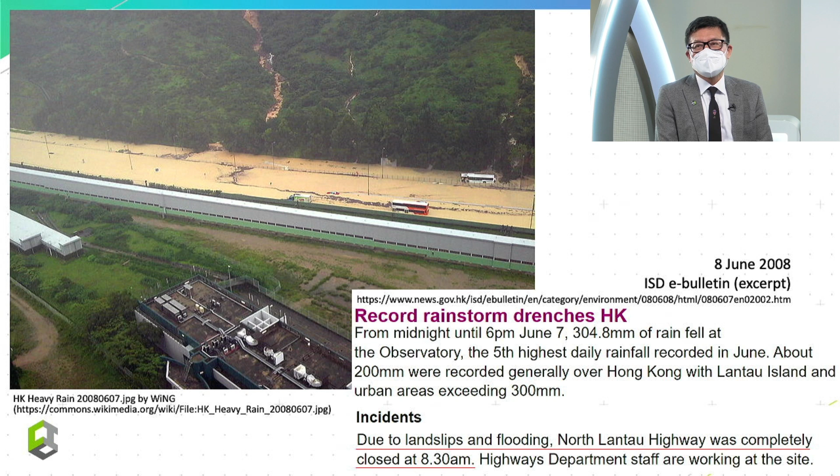Let me tell you something about the background of this project. In June 2008, there was heavy rainfall in Hong Kong. On that day, the whole North Lantau Highway was flooded by rainwater and landslide, so the road access to the airport was totally cut off.

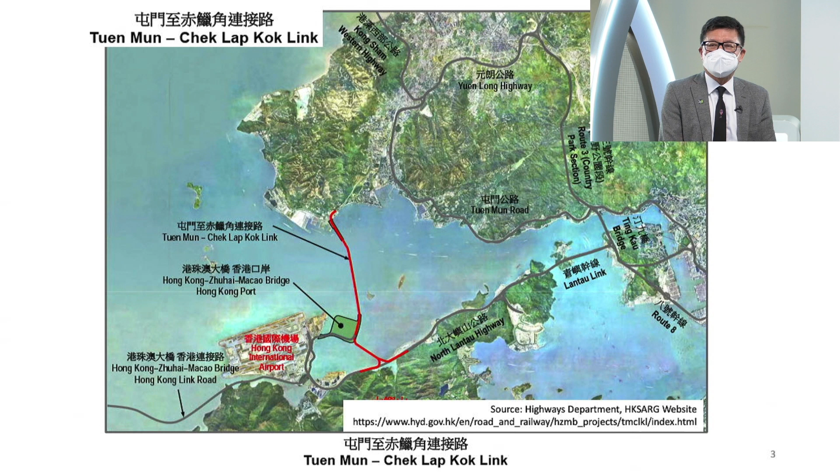This triggered the Highways Department at that time to push hard for an alternative route to the new airport. This slide shows the routing of the Tuen Mun to Chek Lap Kok Link, making use of the man-made island of the Hong Kong-Macau Bridge near the airport to provide a landing point for the tunnel.

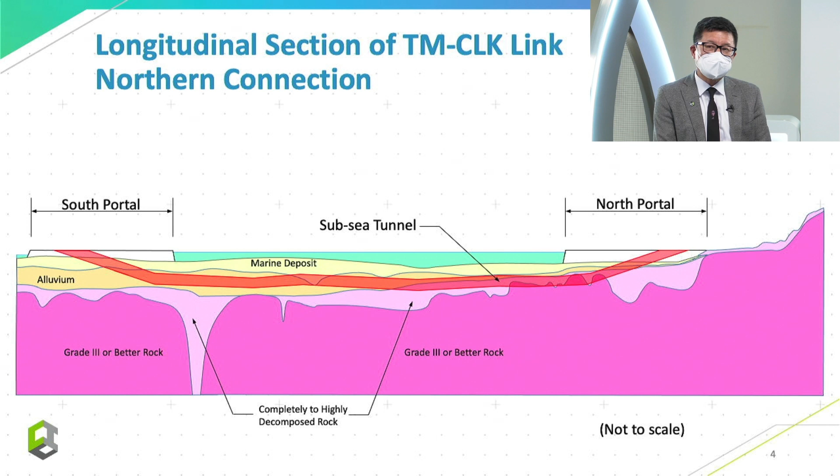After exploring different options for the route, the Highways Department decided to use a very deep subsea tunnel, going through difficult geological seabed conditions as shown in this slide. So you can appreciate how difficult this project is. Without further ado, let me start with the first question to Chris.

The Tuen Mun to Chek Lap Kok Link interconnects with the Hong Kong-Macau Bridge and the existing road network in Hong Kong, and further north to the road network in the Greater Bay Area. So Chris, can you tell us the strategic value of this project?

Okay, thank you Albert. The Tuen Mun to Chek Lap Kok Link is divided into the southern connection and northern connection. The southern connection, mostly on viaduct, was opened to traffic in 2018. The northern connection, mainly comprising a subsea tunnel, was commissioned on December 27 last year.

The strategic value of the Tuen Mun to Chek Lap Kok Link is multifold. First, the 9-kilometer link provides a strategic connection linking Northwest New Territories to North Lantau, Hong Kong International Airport, the Hong Kong-Zhuhai-Macau Bridge, and Hong Kong Port. It shortens the traveling distance between Tuen Mun South and the airport by about 22 kilometers, with journey time reduced by about 20 minutes.

At the same time, it helps divert traffic to and from Lantau, reducing the traffic load on the North Lantau Highway, Lantau Link, and Tuen Mun Road. More importantly, the new link provides an alternative road access between the airport and the urban area in addition to the Lantau Link, providing a better and more reliable transport structure to Lantau, which is the aviation and land transport double gateway connecting Hong Kong to other parts of the world and mainland cities of the Greater Bay Area. This reinforces Hong Kong as an international and regional hub.

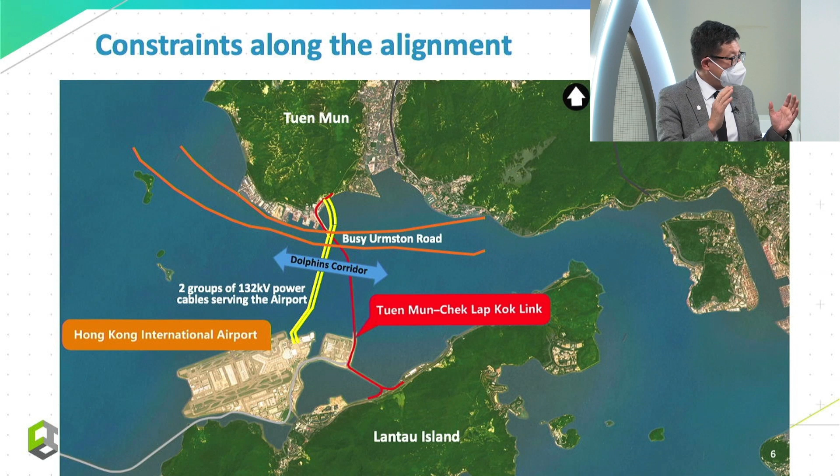Okay Chris, I understand that the Tuen Mun to Chek Lap Kok Link is the first subsea deep tunnel constructed by TBM, so there must be a lot of challenges during construction. Can you tell us some of them?

Yes, it's a very challenging project. The section of the northern connection linking Tuen Mun and the Hong Kong-Zhuhai-Macau Bridge, Hong Kong Port, lies across Urmston Road, which is one of the busiest navigation channels in Hong Kong. The alignment of this section is within an environmentally sensitive area.

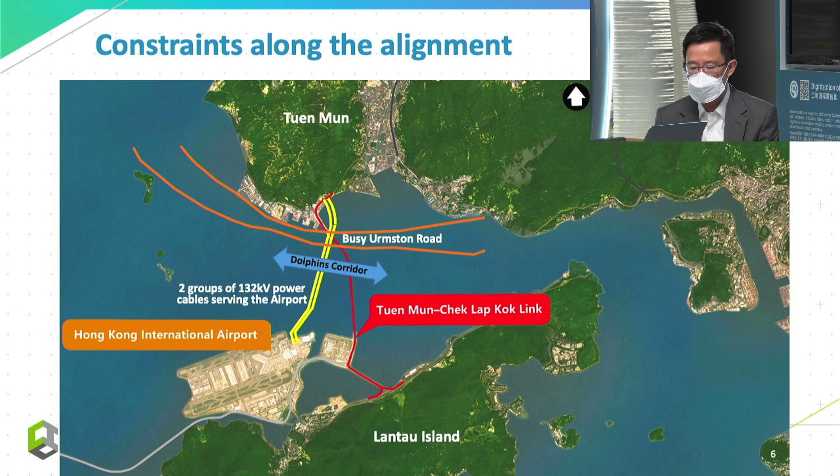There are also two submarine power cables serving the airport. To minimize the impact on Urmston Road, the habitat of the Chinese white dolphin, and the nearby marine ecology, and to avoid the need to divert the existing submarine power cable serving the airport and eliminate dredging and disposal of 11 million cubic meters of marine sediment, a TBM scheme was chosen for the Tuen Mun to Chek Lap Kok Link subsea crossing in preference to immersed tunnels.

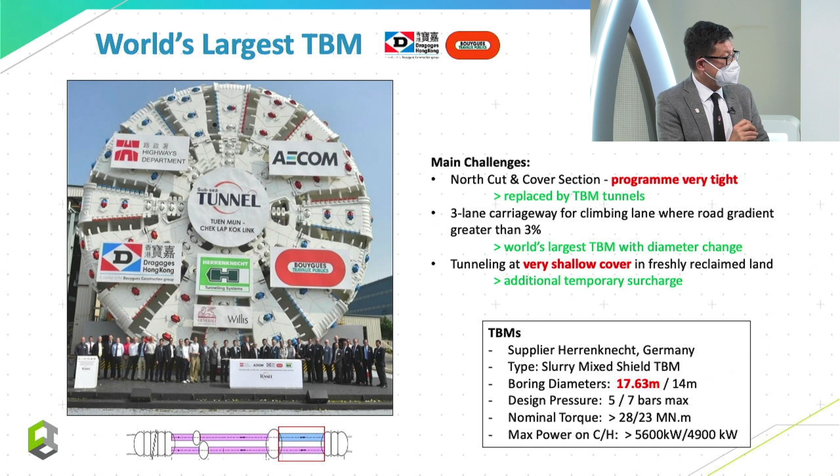I see. Okay, now Wes, Chris just talked about the challenges, so there must be some very interesting solutions to resolve these challenges. As the main contractor, can you tell us something about it?

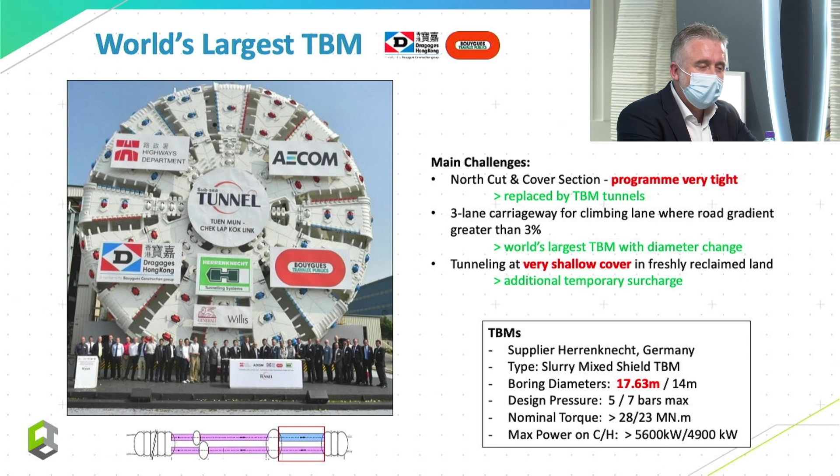Sure. As Chris said, for the challenging geology we used two slurry TBMs for the main drives. However, the original scheme also required construction of traditional cut and cover structures at the north and south approaches in newly formed reclamations. So the additional challenge was the time needed to construct the reclamation first, and then the traditional cut and cover structure, both taking quite some time.

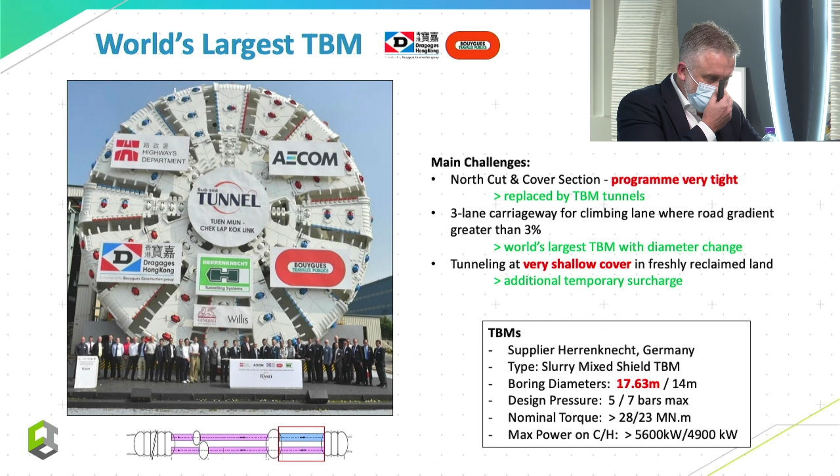So we developed a scheme to replace the cut and cover with extended TBM drives, resulting in a much smaller launching shaft and then extended tunnel section up to the ventilation shaft. This solved some of the problem, but it also created other challenges because the road gradient on the northbound incline was around 3%.

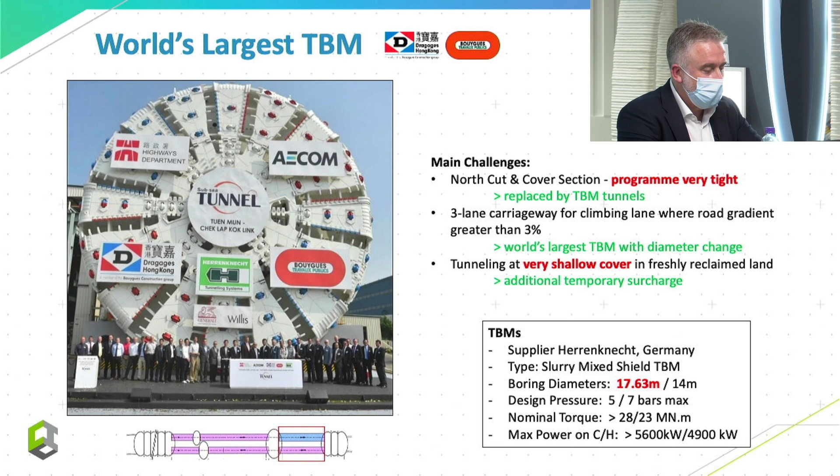Therefore, we needed 3-lane width on the alignment and a very large cross section. So the solution here was to introduce the world's largest TBM.

Whilst this overcame the width challenges, it also created other challenges which needed careful consideration, such as how to construct such a huge machine inside a shaft, and how to accommodate up to a 560-ton capacity crane — some very challenging constructability issues.

So we designed a circular shaped D-wall for the shaft, which is a very stable structure, with strutting needed only at those intersection nodes of the circular elements.

If we play a short video now, you can see in a time-lapse video the assembly of the machine. You can see the pieces of the shield being installed with the main drive. Then we install the face of the machine, the back part of the shield going in, then the segment erector, and then the backup gantries to follow. You can see here lots of working space and a really good working environment for such large equipment.

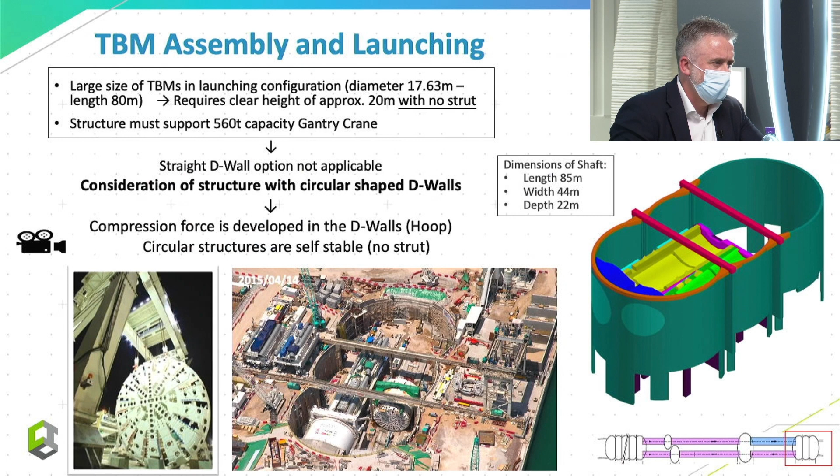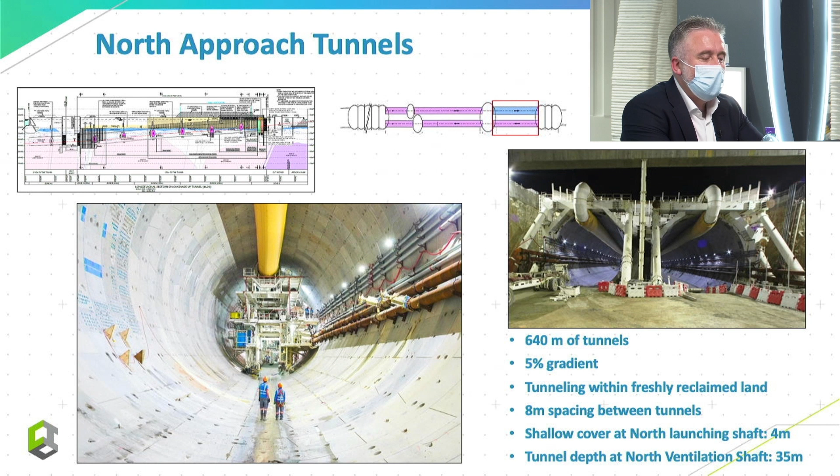Then we launched both machines. Particular care was needed here, especially at the beginning where we had as little as 4 meters of cover, and we end up with 640 meters of twin tunnel, replacing what would have been a very time-consuming cut and cover structure. So we arrived then at the north ventilation buildings.

The next challenge: how do we cross this vent shaft? And at the same time, we have to reduce the size of the large diameter machine, because as we get into the subsea section, we no longer need this large diameter.

So for the first machine, we created a steel bell. You can see to the right of that photo this steel bell structure filled with concrete. This allows the first machine to pass through in a normal tunneling mode. It takes about 1 week, where normally it would probably take more than 2 months.

We don't need the very time-consuming construction of break-in, break-out structures and so on. At the same time, it allows sufficient space to remove the larger diameter shield and replace it with a smaller diameter.

You can see again in the picture on the right, a bit rusty, the larger diameter shield being replaced at the front of that photo with the smaller diameter.

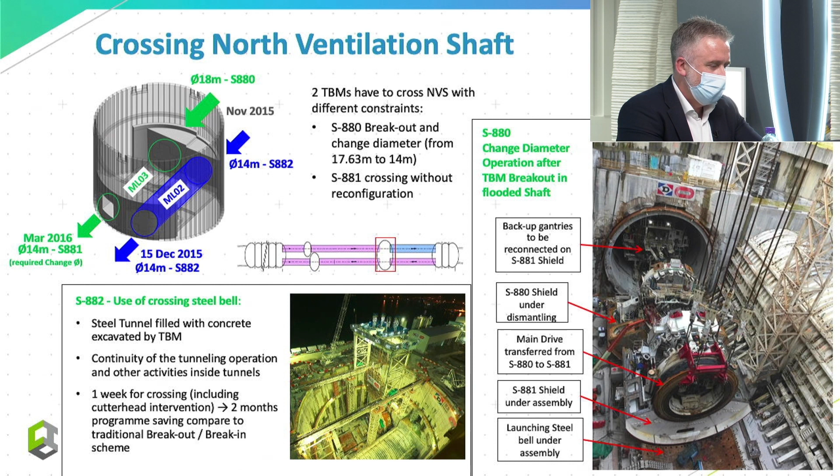Oh, okay, great, Wes.

Understand that, as you said, the size of the TBM cutterhead was the largest in the world at that time. And also because the tunnel needed to go underneath the sea, 50 meters below sea level, it must be very difficult for the workers to go out to do maintenance on the cutterhead. Can you tell us if there's any special method to cater for that kind of situation?

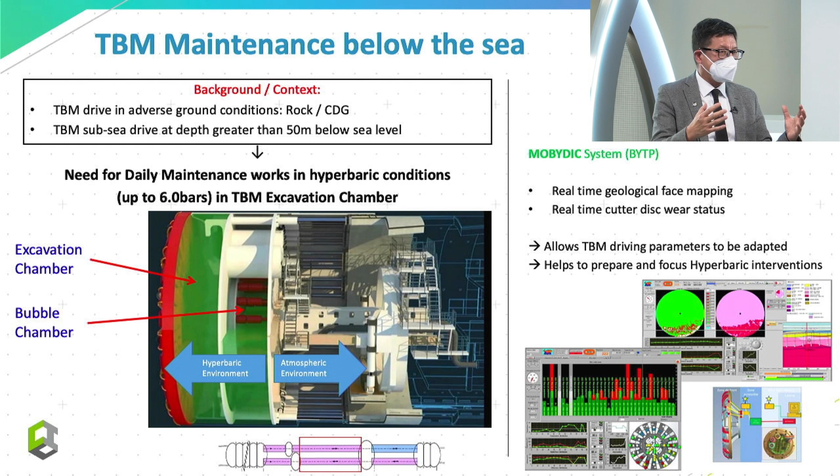Sure. If you look at the photo on the left here, before talking about specific solutions, let me remind you what it looks like inside the shield of the machine. You can see to the left we have the excavation chamber full of slurry. Behind that, we have the bubble chamber where we use air pressure to moderate the pressure at the face.

When we need to go in to change cutting discs, we go in through the airlock. We lower the slurry going through the airlock, and then the guys work in quite a challenging environment to do the necessary maintenance and so on.

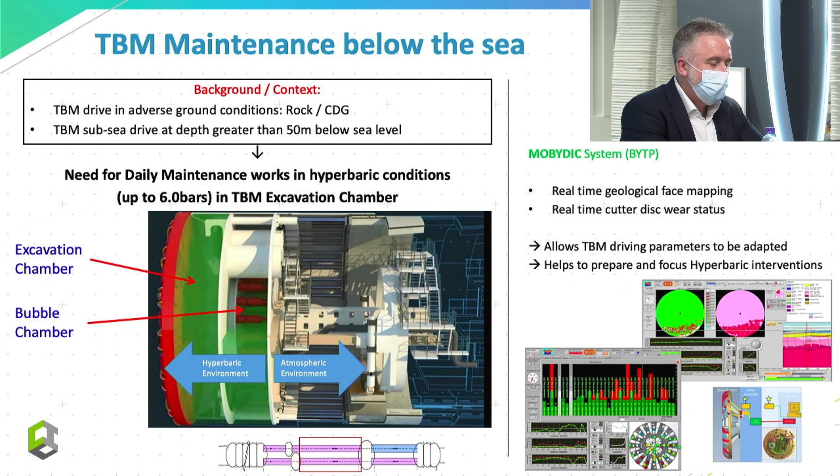We also have a quite innovative in-house system called MOBYDIC. This allows us to get real-time monitoring on the geological conditions, the condition of the cutting discs, etc. You can imagine though, doing this at 6 bar of pressure because of the depth, it becomes a very high-risk activity and quite time-consuming if you're using traditional diving techniques.

So we introduced a saturation diving solution. It's a very sophisticated setup with a very specialised team. At peak we had up to 6 doctors, 3 nurses, day and night shift, and some 45 professionals working in hyperbaric conditions. We had to work very closely with the labour department, with a lot of liaison and coordination with them.

With this technique, the divers are able to work in much longer working cycles in much safer conditions, and they typically stay in this hyperbaric environment for up to 28 days.

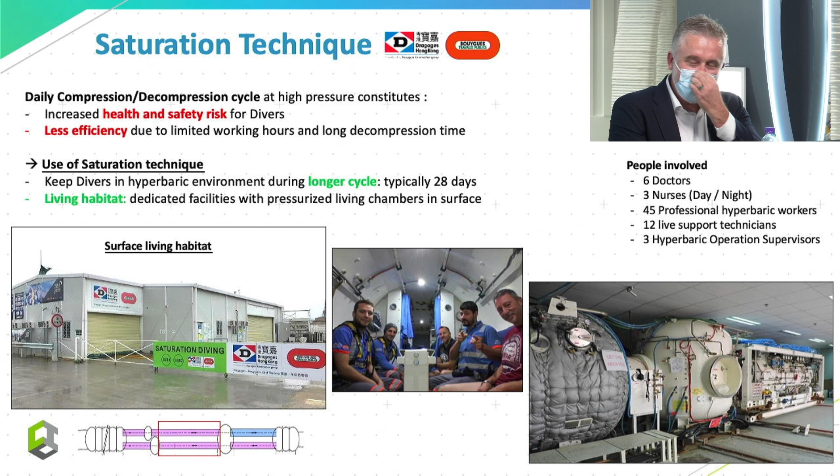And I know you're asking the questions today, but I want to throw one back at you, just to surprise you. Two most important things for the divers when they're working in this environment, any guesses? Well, I think it must be living within the compressed air conditions, and also how to make sure they're happy. Yes, exactly. So the two most important things: do I have Wi-Fi, and what's the menu? I see. So if we were able to satisfy those two requirements, then generally we were able to keep the guys reasonably happy.

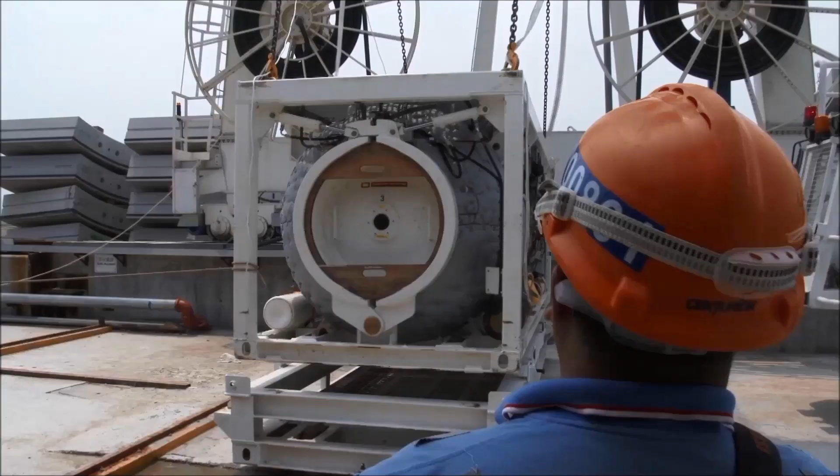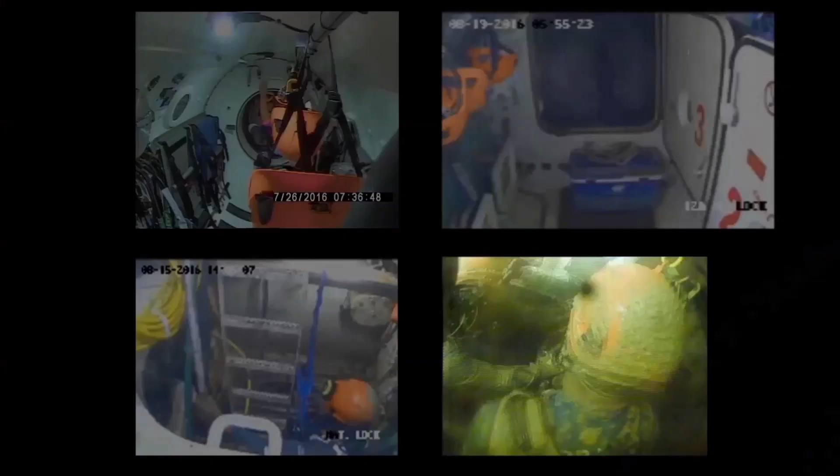So here we play the first video on the top left, just so you can get a bit of a feeling on how it works. The guys are inside this steel tube. They get transported down to the machine, then launched onto the machine, moved up to the face, connect into the machine, and then they can go about their business and come back. It's a bit rushed, this video, but you can get the idea.

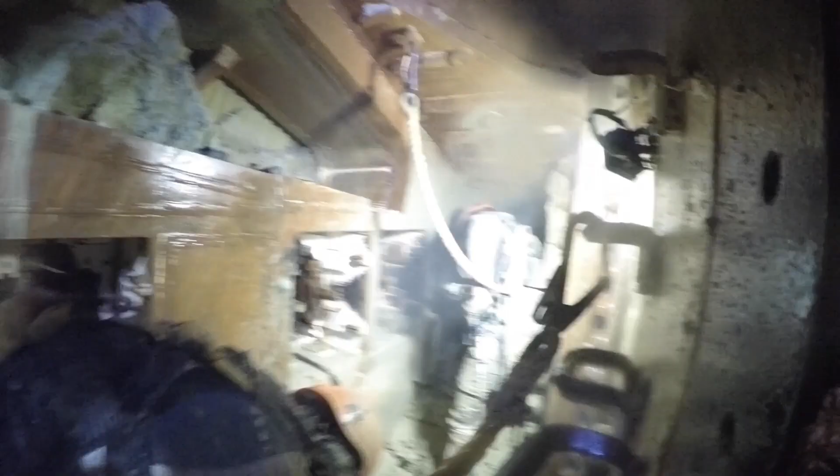So 28 days living within that cycle. If you play the video on the bottom right, I thought it could be interesting to show, because not too many people have seen this, but this is the working environment the guys have to deal with. You can see it's not easy working conditions, physically demanding. Imagine doing that, getting back into your little steel bubble, back to the surface, and doing that in and out for 28 days. Quite a demanding role, quite a difficult job for the workers.

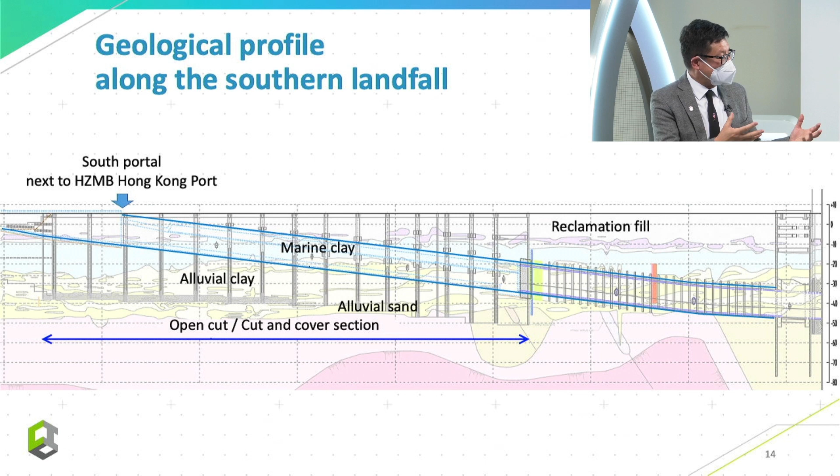Now, in the first slide, we have seen that the Tuen Mun to Chek Lap Kok link will land at the man-made island, the Hong Kong-Macau Bridge at the southern end. Because of the man-made island, the soil condition is quite special, so we expect there's some special method in the construction of the southern connection. Chris, can you tell us what are the difficulties and challenges in that part of the construction?

In general, the geological configuration along the tunnel alignment is typical of the Hong Kong area, with a seabed made of very soft, compressible marine deposit over sandy or clay alluvium. Below this layer, highly decomposed granite is found on top of the bedrock. However, on the southern landfall, the ground conditions are particularly adverse. The marine deposit and clay alluvium are very thick and deep, up to 30 meters thick, and up to 50 meters below sea level. Also, the bedrock is very deep, down to minus 90 mPD in some areas.

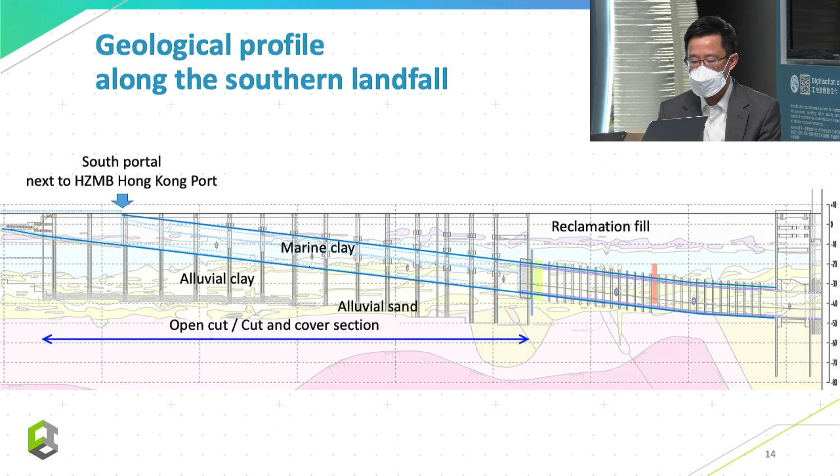If we use a conventional diaphragm wall cofferdam, we'd still struggle to build this section as a cut and cover section. For a cut and cover tunnel, a very congested ELS would be required to support the cofferdam. We need to control its stability very carefully, and extensive ground treatment would be required to stabilize the whole system.

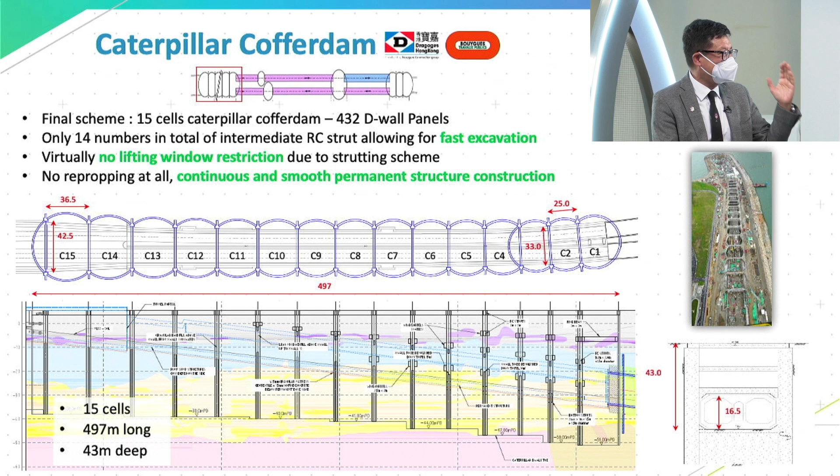I see. So Wes, I'd like to ask you, because I was told there's a special name for that kind of construction - they call it the caterpillar. Can you tell us more about this caterpillar type of construction? I understand this is the world's first type of construction. Yeah, probably the longest caterpillar as well.

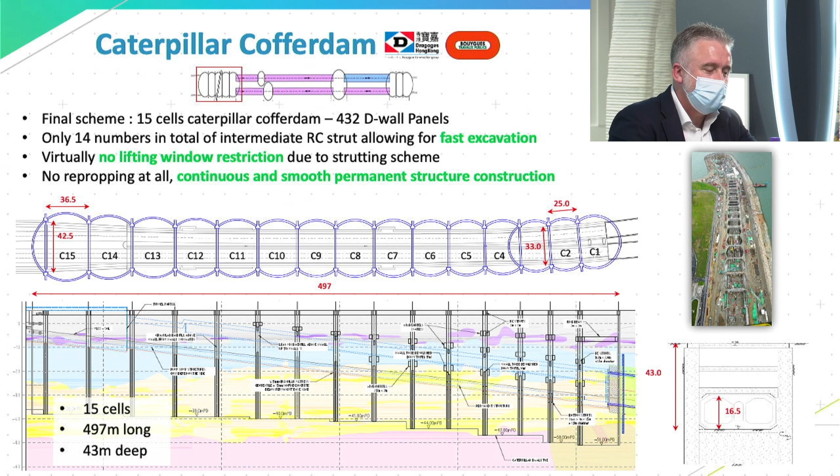The principles are quite similar to what we did on the northern end of the alignment, where we had this more peanut-shaped launching shaft, much smaller. Here we've extended the length of the design. As Chris said, building a traditional cut and cover in such ground conditions and with such a tight time frame would have been virtually impossible. So we developed this caterpillar design, some 15 cells in length, 432 D-wall panels, with the obvious advantages of working in a virtually strut-free environment, so much faster to excavate and much faster to construct the permanent structure.

However, as is usually the case with these things, it still has its own challenges. One of the most critical parts of this caterpillar design was the Y panel at the nodes where the circular shapes join. They transmit very heavy loads, so they're very large, very heavily reinforced, with quite a complex geometry. We had up to 900 cubic meters in any one panel, some 130 tons of reinforcement, and very complex lifting operations, sometimes using 3 cranes to rotate the cages, plus very heavy craneage, 400 ton capacity, to install the cages as well.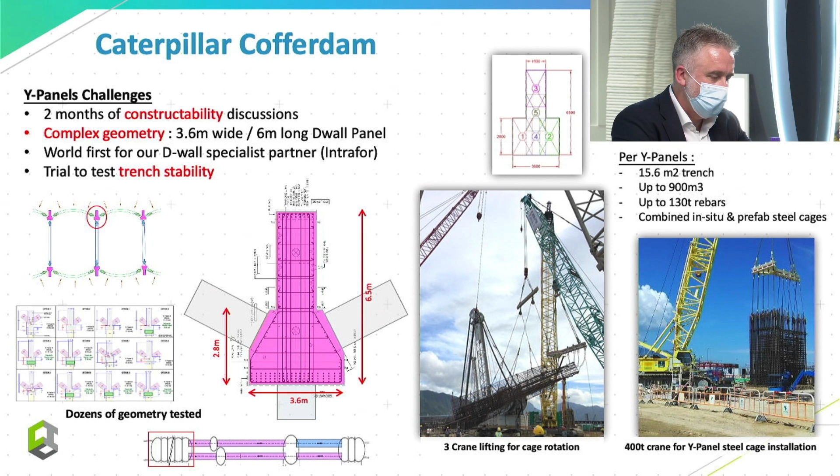Probably one of the main risks in doing this, because of the size and time it takes to construct these panels, is trench stability. We had to implement certain measures to ensure stability in the trench while doing the excavation, installation of the cage, concrete pouring, and so on.

The other challenge was, in terms of program, we wanted to break into the shaft with both machines as early as possible. To allow the machines to break out before excavation of the entire caterpillar was complete, we came up with a scheme to isolate the first 3 cells by introducing a back arch. You can see that at the bottom left of the image. But this introduced even more complex geometry for those nodes.

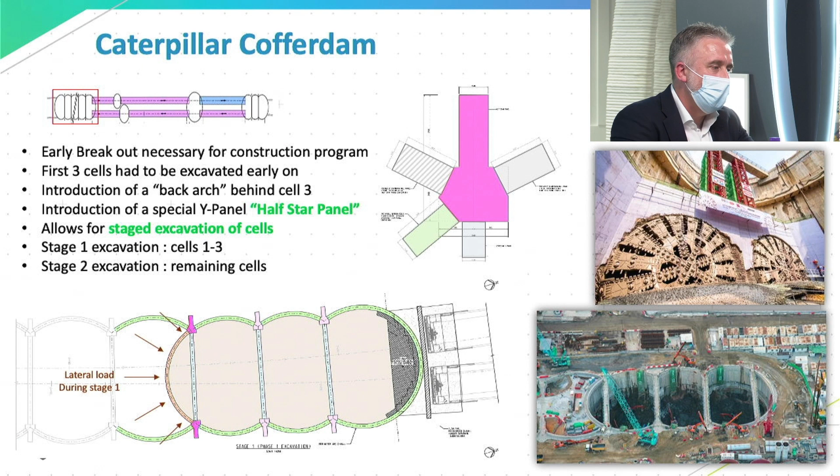So we came up with this, what we call a half-star panel, and this allowed the first 3 cells to be excavated, the machines to come in, whilst we're still working on the excavation further up the caterpillar.

Just a couple of images here, and the main point is you can really feel the amount of space we have to work with. In terms of productivity, the excavation goes much faster. The construction of the permanent structure also goes much faster. And of course, a much safer working environment, which is probably the most important thing.

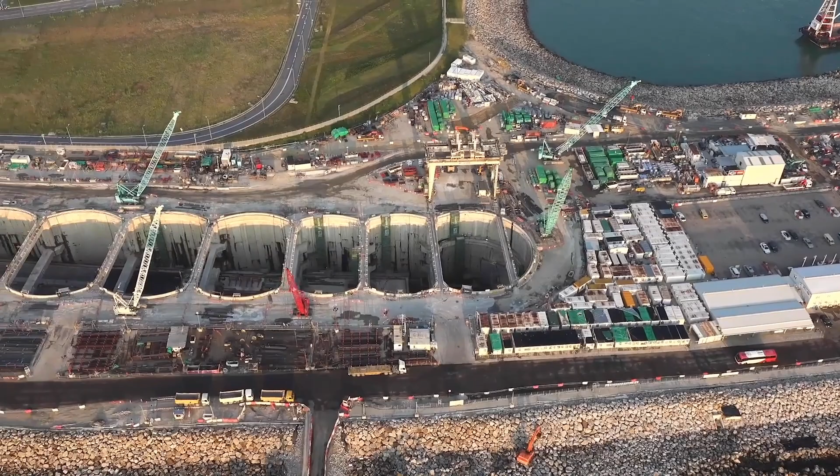A little bit of an aerial drone shot, if we can just play that video. You can appreciate the scale of what was achieved here.

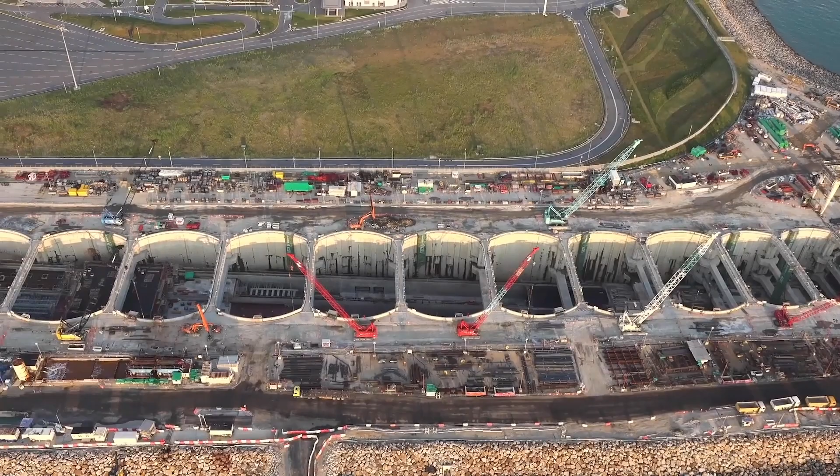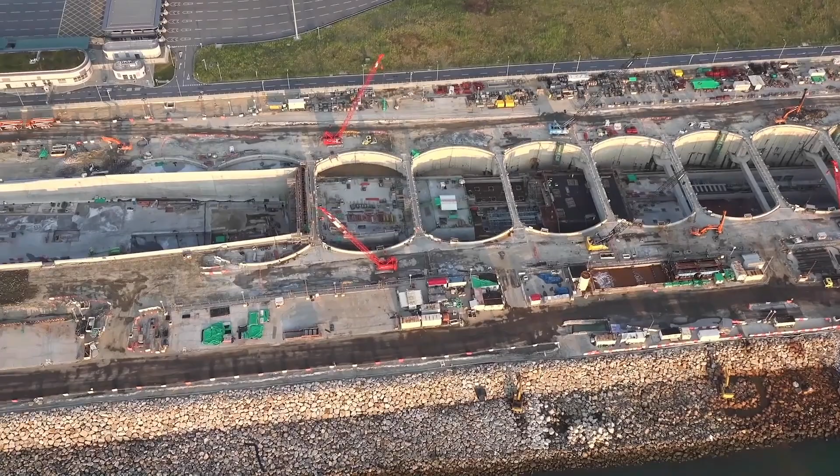There is a bit more excavation overall, and a bit more quantities in the diaphragm wall panels, but this is far outweighed by the improvement of safety and productivity, and I think that's really the most important thing.

Okay, good. I also understand there's a very special feature of this project. There is a service gallery underneath the carriageway within the tunnel for housing utilities and also for future maintenance. It's a very special thing for this kind of chamber in a tunnel under such a deep level of sea.

So Chris, can you tell us something about any innovative measures adopted for this service gallery? Indeed, it's a very special feature, as mentioned by Albert, to make good use of the space under the tunnel carriageway formed by the TBM construction.

The engineering team developed a very smart idea to provide a service gallery under the tunnel carriageway to house utilities and E&M facilities. Some drainage pipes, fire mains, power supply, and control systems for some of the tunnel facilities were installed in the service gallery to facilitate future maintenance.

Part of the daily maintenance work can be carried out at the same time during tunnel operation. This arrangement also reduces the risk of tunnel closure due to emergency repairs. Besides, electrical vehicles are provided for commuting inside the service gallery to improve the efficiency of the maintenance work there.

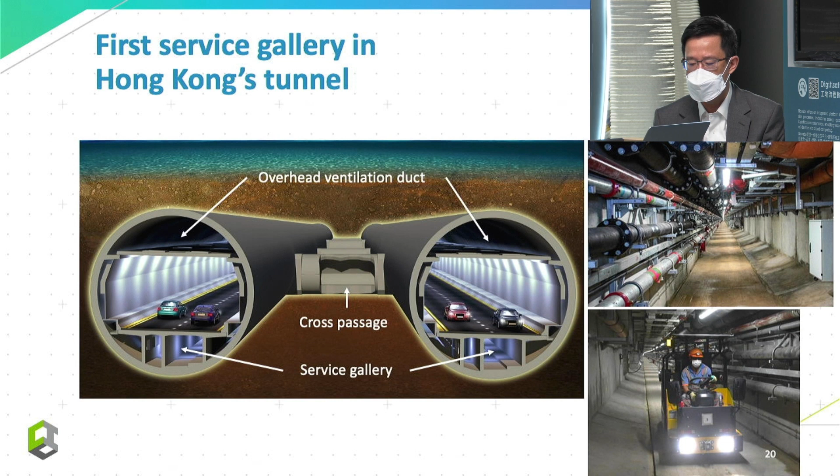Now, as you all know, CIC is always very keen to promote DFMA instead of in-situ construction because it has a lot of advantages. So Wes, I'd like to ask you, as the main contractor for this project, I understand you've adopted a lot of precasting instead of in-situ construction to cater for the difficulty in the tight project program. Can you share some of your thoughts?

Sure. So as you say, like everything on this project, no exception for the internal structures, a very tight timeline. So we needed to find a way of being able to construct the internal structures as soon as possible, following as the machine is progressing through the drive.

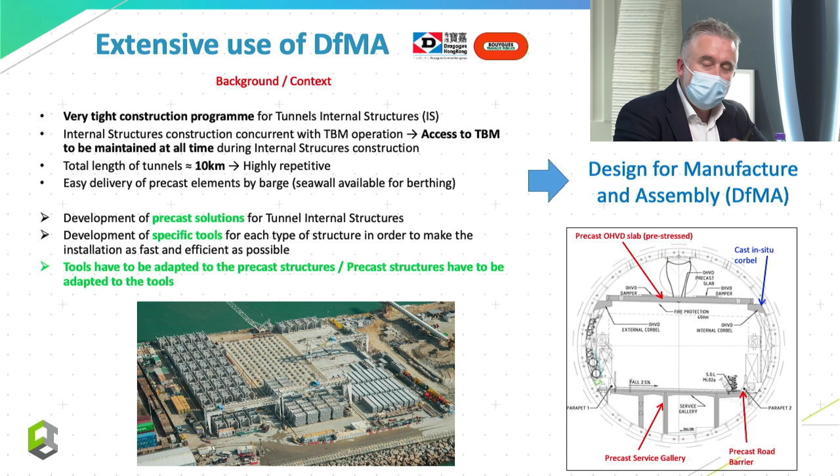Looking at the project, given the length of tunnel, the repetitive nature of the structures, and also taking into consideration that we had direct marine access, it was really the perfect storm to apply the principles of DFMA. We use the terminology DFMA, but in infrastructure we've been using precast for quite some time, and here we were able to really maximise the amount of precast construction for all of the internal structures.

So if you look on the right there, you can see the invert of the tunnel, there's a service gallery, precast, the parapets either side of the service gallery, precast, the OHVD slab on the top, precast. So the only piece left that we had to do in more traditional in-situ works were the two corbels on the sides of the tunnel.

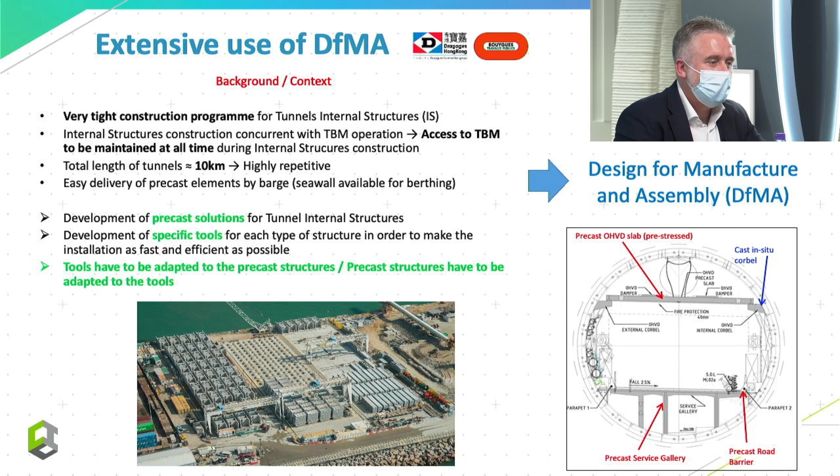And I'll talk a bit later about future opportunities to introduce innovation in constructing those elements as well. So just to show a couple of videos here.

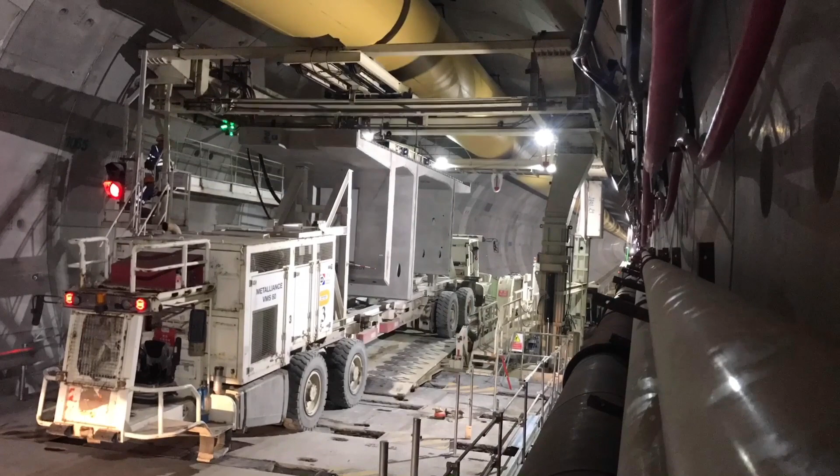So first of all, maybe you can play this video. You can see here the gallery arrives on a truck and is put into place. We have a bespoke tool which is used to lift up the element, install it into position, and then lower it. We needed a tool able to provide ramped access from the elevated height, the top of the gallery, down to the tunnel invert, and do that as quickly as possible without interrupting the logistics and supply to the back of the machine. You'll notice in that video there are very few workers, so it's a much more efficient and safer way of carrying out the works.

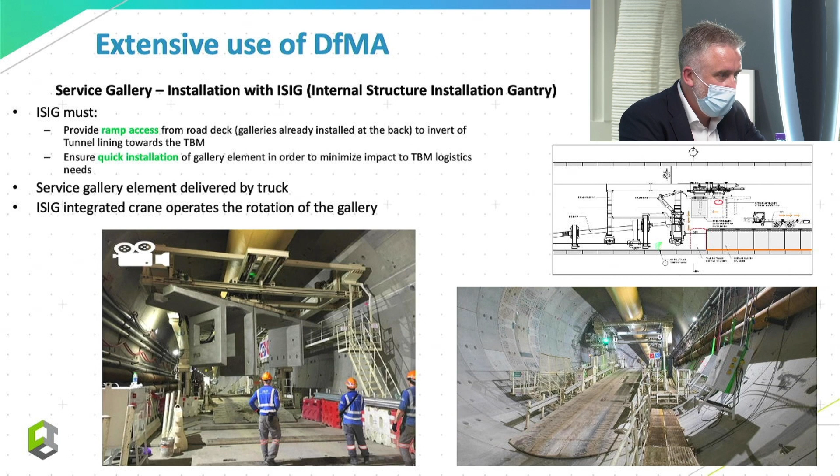The other example is the OHVD slab. Again here, we needed to find a quick and safe way of installing these elements. Maybe we can play the video and I can talk to that. So again, the elements arrive. They're lifted up by a lifting device which was designed with our sister company VSL. We install that into position. You can see we're able to maintain access through the tunnel while this work is ongoing, and again not too many people are involved. You can imagine a more traditional OHVD slab with scaffold and falsework everywhere. So this is a much more efficient, much safer way of carrying out the works.

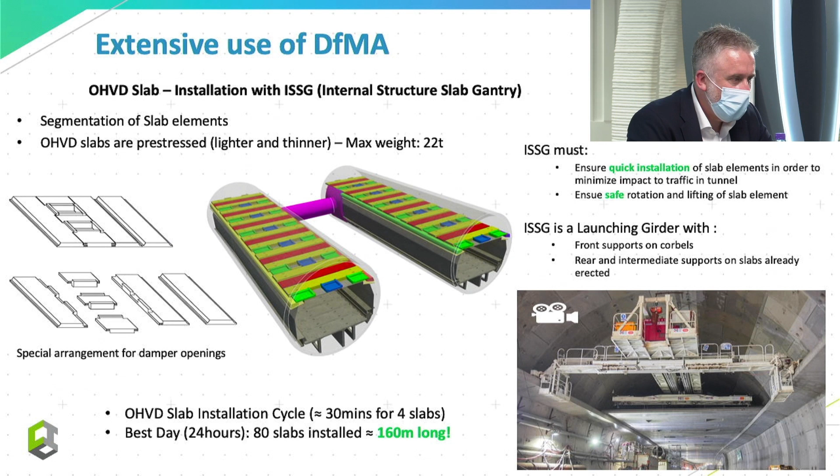Thank you, Wes. So other than DFMA, I understand that in this project you have applied a lot of opportunity for using robotics. Robotics is another thing that CIC is promoting to help with quality and time constraint problems. So can you tell us something about the robotics applied in this project?

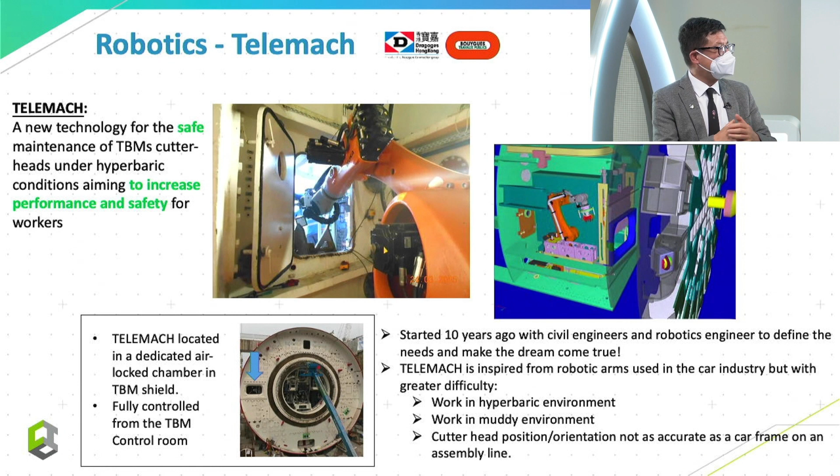Sure. So if you go back to that video I played earlier, thinking about the guys working inside the cutter head, how difficult the working conditions are and so on — within the company we've been working on this solution for nearly 10 years now. It's called Telemach. The idea here is, again, to improve safety, to improve the working conditions, and to improve efficiency in how we work.

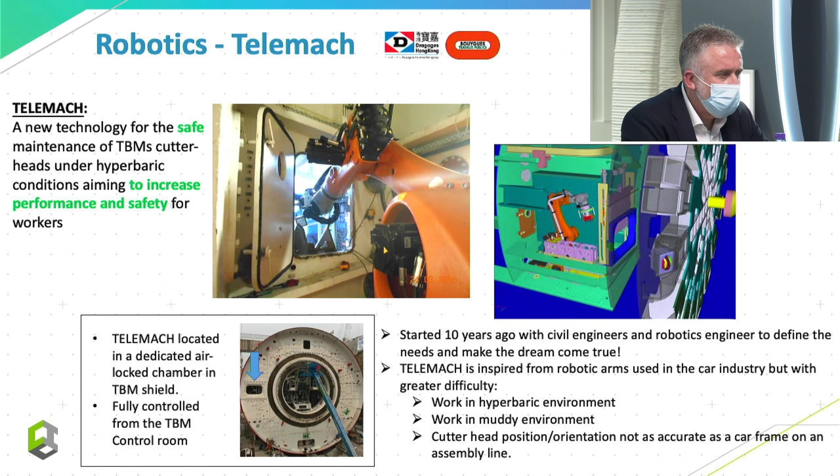So it's a robotic arm located inside a dedicated airlock. You can see on the bottom left, the blue arrow — there's a dedicated airlock here where this robotic arm is positioned. On the right you can see a sketch of what it looks like. If I go to the next slide...

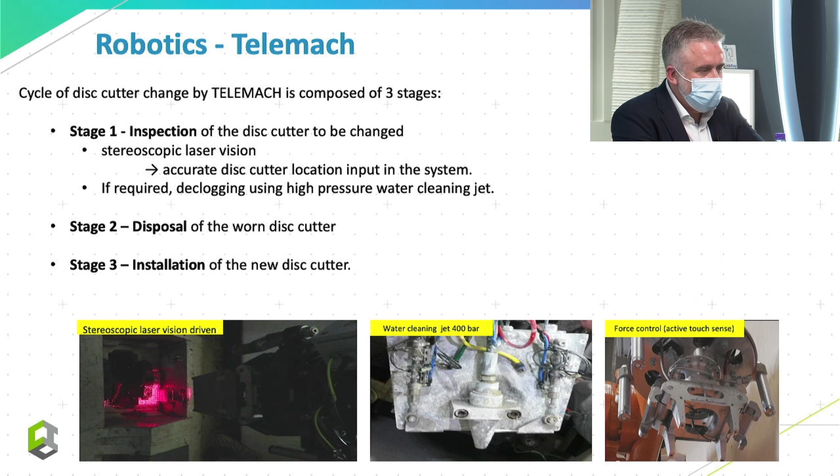So the idea here is that the robotic arm works in three stages. The first step is to inspect the location — it has stereoscopic laser vision to inspect the location and position itself. If necessary, it's able to clean the environment with a water jet. Then it goes in, removes the worn cutting disc, puts it in a console, picks up a new one, and installs it into position.

So again, I think there's a short video here. If we can just play that video. It's a little bit slow, but you get the idea.

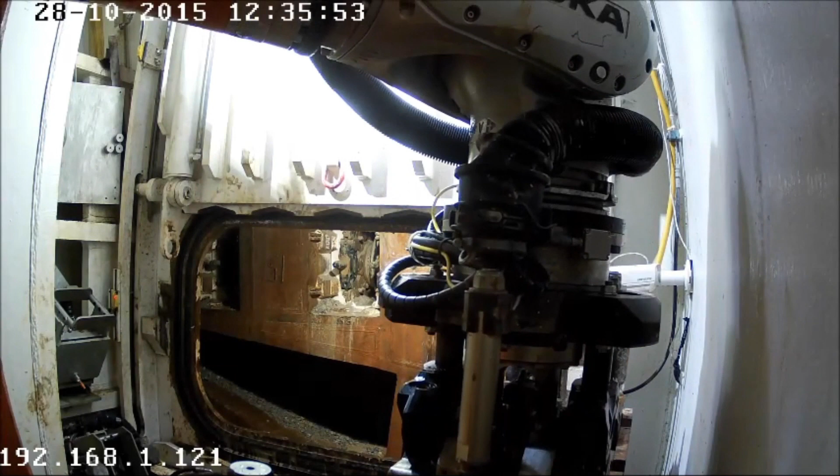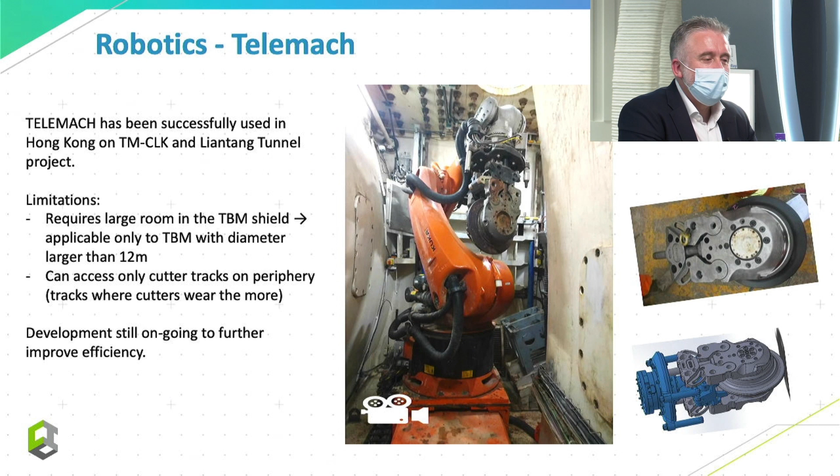I guess it's an ongoing development. One limitation is that it takes up quite a bit of space, so we need large diameter machines, in the order of 12 meters or above, to have the space to do it. The other limitation, for the time being at least, is that the location of the airlock is only at the periphery of the machine. So whilst this is where we have most wear in the cutting discs, it doesn't allow us to be fully robotic in this operation. This scheme still has ongoing improvement, but there are still some elements which require human intervention. I'll talk shortly about another innovation we're going to introduce into Hong Kong, which overcomes this challenge.

So, yeah. So this is about the robotics — that's applied in that robotics project, on that project. Wow, yeah, very impressive. I'm sure the audience is really enjoying knowing about how you apply robotics in these projects.

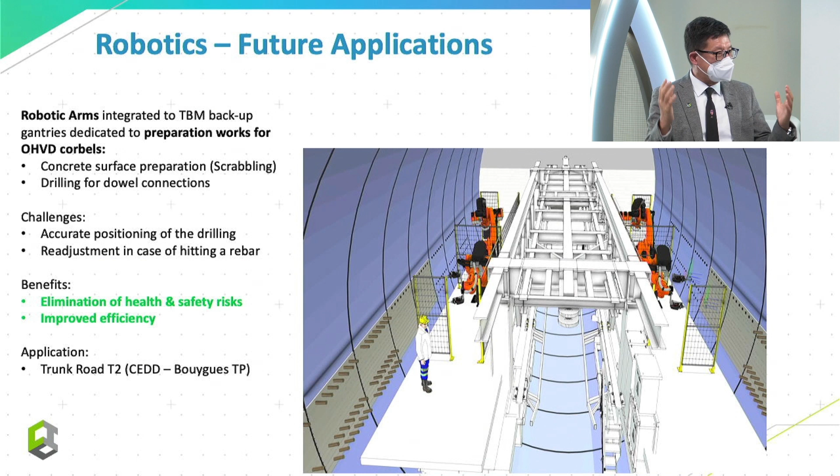So with your experience and your insight, in future similar construction projects, what do you think would be the robotic application, and also other innovations that you can think applicable in the future? Yeah.

Thinking back to what I mentioned about the corbel being the only element of the internal structures which still today is done in situ, our next development, which we're going to introduce into the Trunk Road T2 project currently ongoing, is to have robotic arms on one of the back gantries of the TBM. This will allow us to do a lot of that high-risk, laborious activity: scabbling the face of the lining, drilling and installing anchors, and so on. This will take out one part of the traditional way of constructing these corbels, but not the entire step.

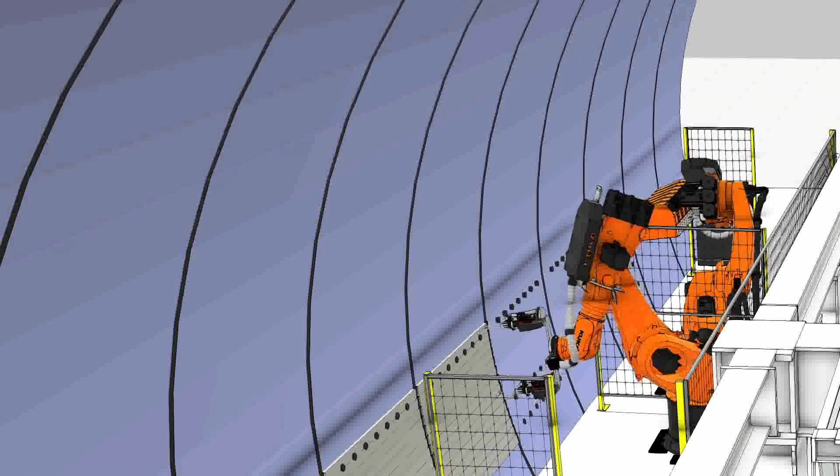There's a little video here, just so you can get the idea. These will be mounted on the gantry, as I said. We're able to scabble the face, prepare the surface, and drill the anchor holes, and this takes out what would otherwise be quite a risky working-at-heights operation.

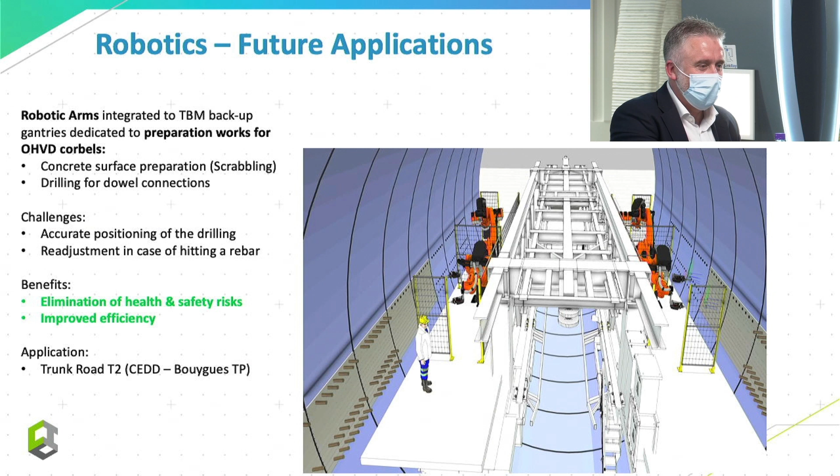Then, step by step, the next challenge for the teams, not for this project but in the future, is to find a way of trying to construct maybe with some kind of horizontal slip form or something of this nature, where we can actually be extruding the construction of the corbels as we progress with the TBM drive.

Right. Okay. Thank you, Wes.

Today, just now, both Chris and Wes have shown us some special features of the projects. Maybe not enough for you, but because of the time limitation, let's have an overview video of the whole project first, and after that video we will have a short time to answer any questions if raised by the audience.

Sorry, maybe just before you go—there was one more. Sorry, there was one more new innovation which I wanted to share with you.

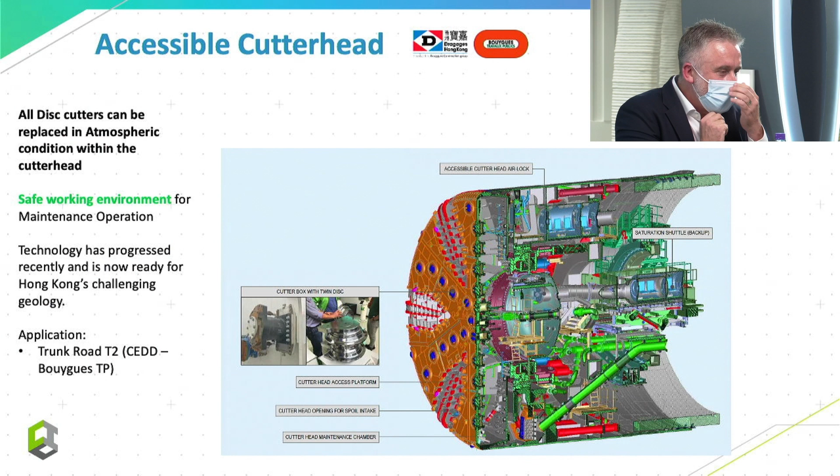Why not? As I mentioned, the robotic arm is very innovative, but has some limitation in how much of the face it can cover. So again, on this Trunk Road T2 project, we're going to bring a new technology into Hong Kong, which is now ready to be used, and that's what we call an accessible cutter head.

It's a new technology, but it allows all of the cutting discs to be replaced in atmospheric conditions. We don't need the guys to go into the face, as we saw in that earlier video, and we're able to achieve this using individual airlock chambers at each of the disc locations. So, a much improved working environment—no need to go into hyperbaric conditions, no need for saturation diving and so on.

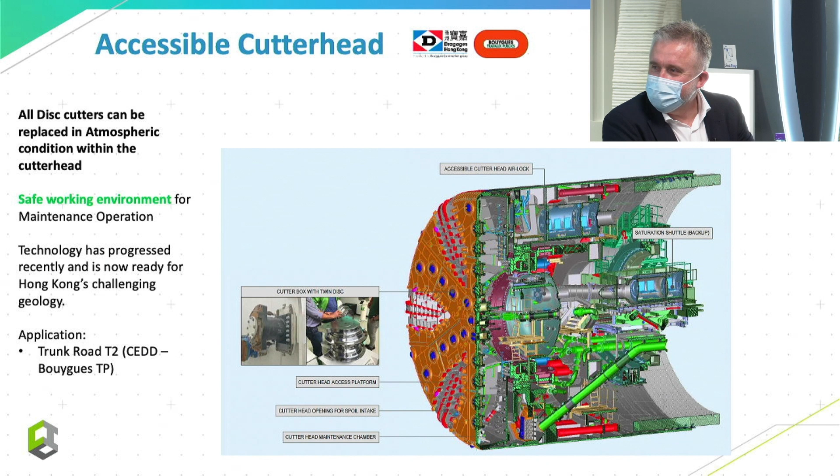So, it's new to Hong Kong. It's very exciting, and we will hopefully have an opportunity to come back at a later time and share that when we have a bit more feedback. Thank you, Wes. Now, as I said, let's have an overview video of the project, then we'll have a Q&A section after that.

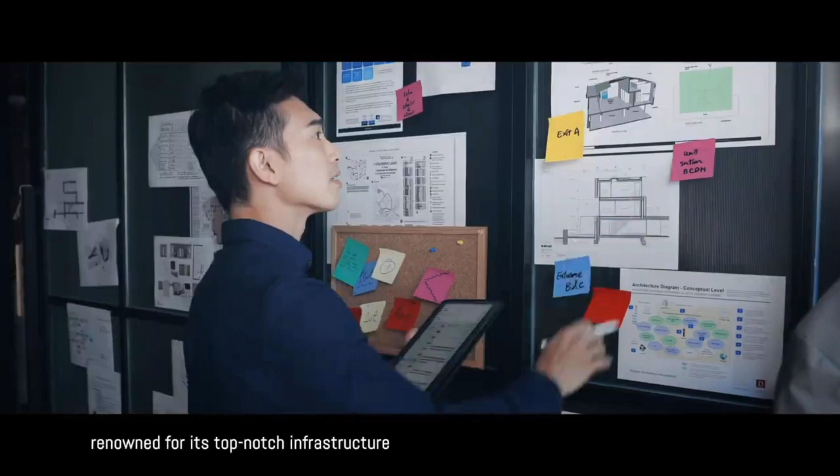Hong Kong, one of the busiest cities in the world, is renowned for its top-notch infrastructure. The new link further enhances the city's transport network, bringing convenience to our daily life.

The northern connection includes a sub-sea tunnel connecting northwest New Territories with the Hong Kong-Zhuhai-Macau Bridge Hong Kong Port and the Hong Kong International Airport. The southern connection includes a viaduct linking the Hong Kong Port and North Lantau.

The link not only shortens the journey between Tuen Mun and Lantau, but also diverts traffic from the Lantau Link, relieving traffic load for road networks in both areas, and offers new possibilities in travel and living.

Journey time between Tuen Mun South and the Hong Kong-Zhuhai-Macau Bridge Hong Kong Port, as well as the Hong Kong International Airport, will be shortened from half an hour to 10 minutes. It enhances the airport and the Hong Kong-Zhuhai-Macau Bridge as transport hubs, and provides connection to the Greater Bay Area and the rest of the world, creating endless opportunities for the city.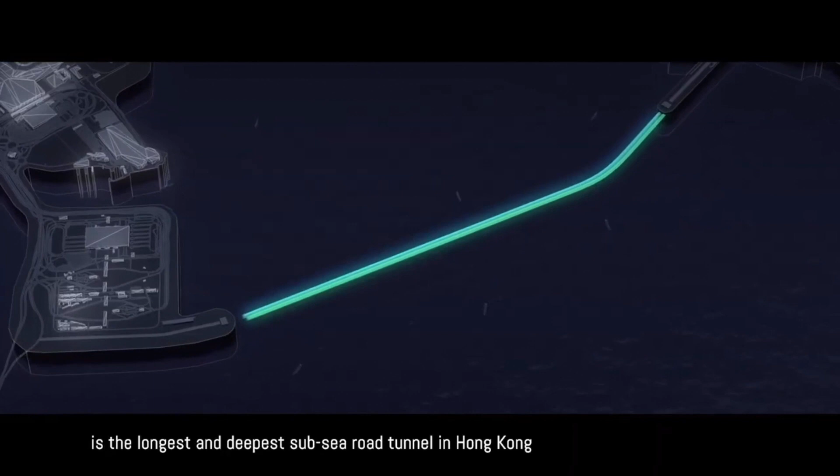The tunnel is the longest and deepest subsea road tunnel in Hong Kong, approximately 5 kilometers in length. The project is marked by enormous scale and sophisticated construction processes. The project team overcame various challenges by employing expertise throughout the design and construction process.

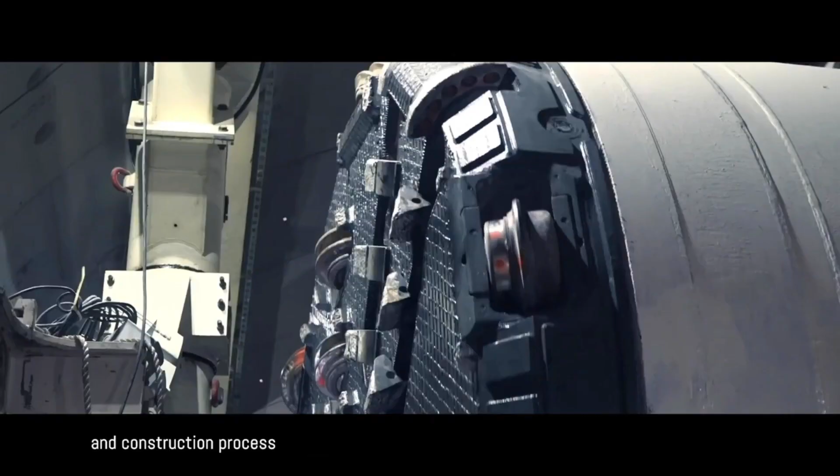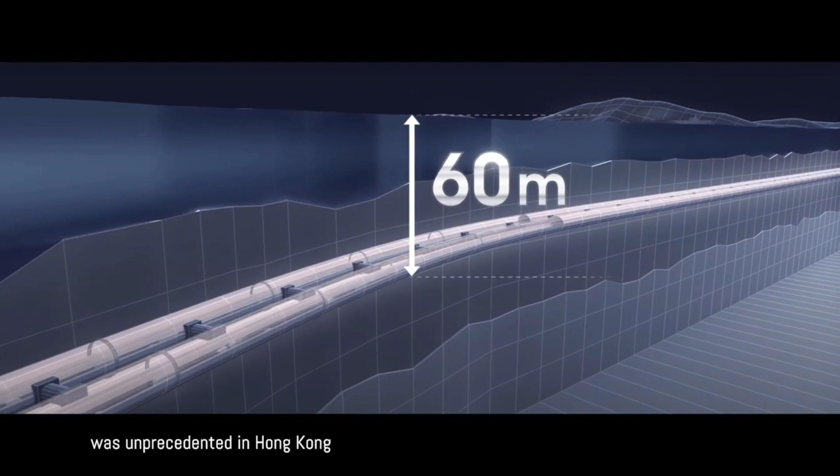Innovative technologies were adopted for tunnel construction, including saturation technique and caterpillar cofferdam. Tunnel construction at 60 meters below sea level was unprecedented in Hong Kong and posed tremendous challenges to the team. The project team deployed the world's largest tunnel boring machine, with a diameter of 17.6 meters.

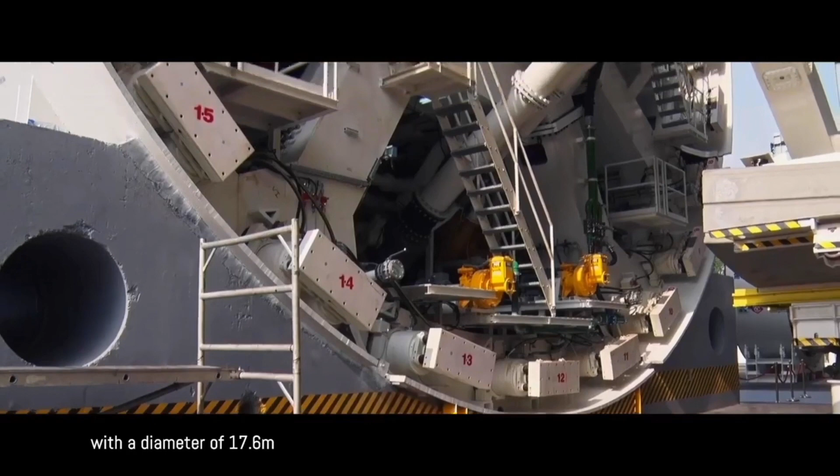It is as tall as a 6-story building, or 4 double-decker buses stacked together. This method greatly reduced excavation and sediment disposal, and helped protect the environment.

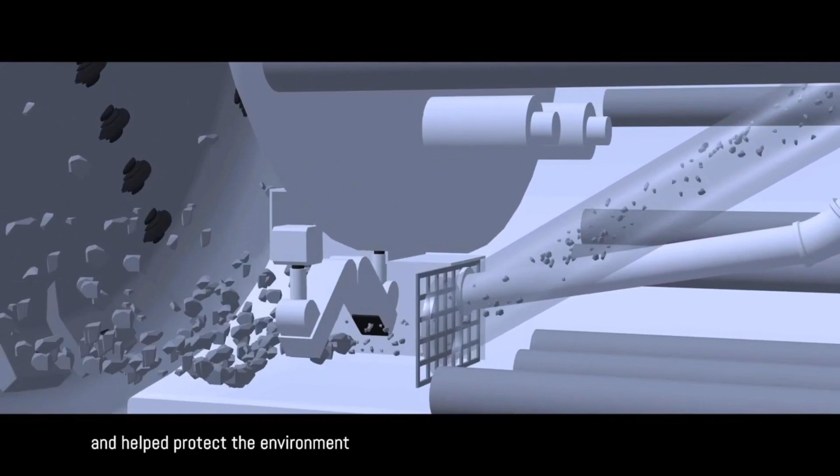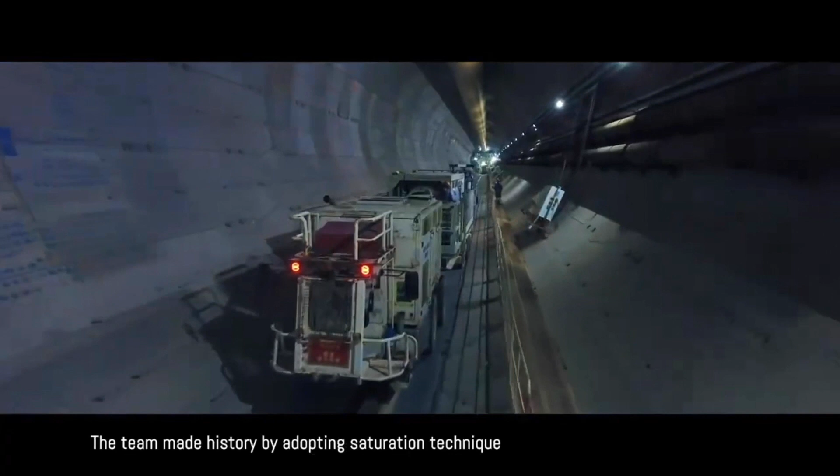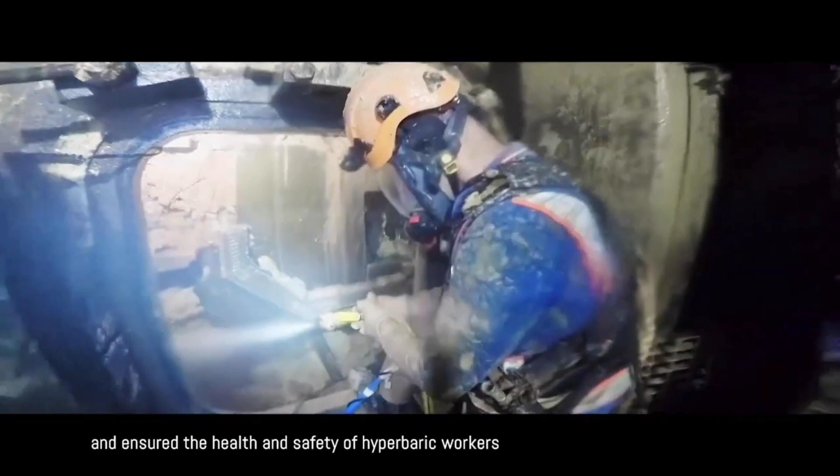To perform excavation at such depth, the team had to overcome a hyperbaric environment with up to 6 times normal pressure on land. The team made history by adopting saturation technique and pressurized living chambers, unprecedented in Hong Kong. This minimized the need for decompression procedures and ensured the health and safety of hyperbaric workers.

The team also applied other innovative technologies, such as real-time surveillance of boring machines and remote-controlled machineries and robotic arms, to reduce manual labor under hyperbaric environment.

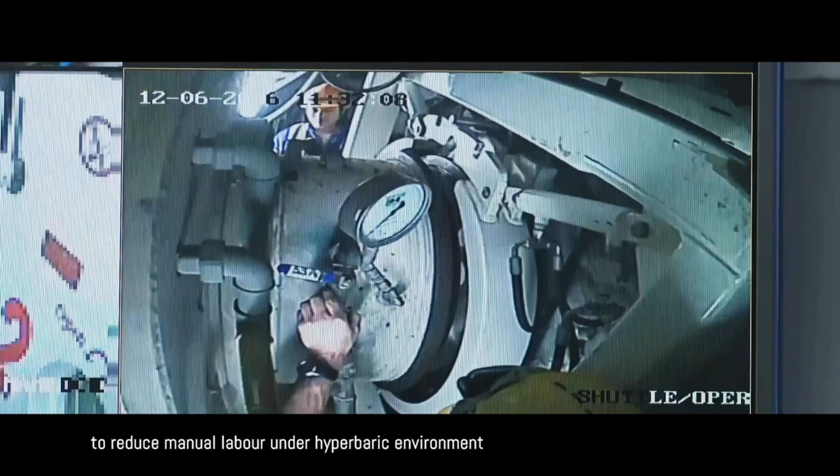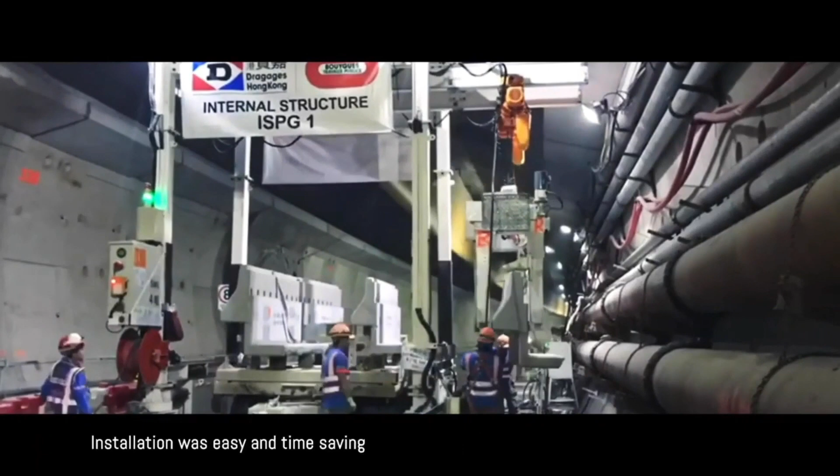To increase efficiency, huge amounts of precast units were used, which greatly reduced the number of on-site labor. Installation was easy and time-saving. It also improved the working environment.

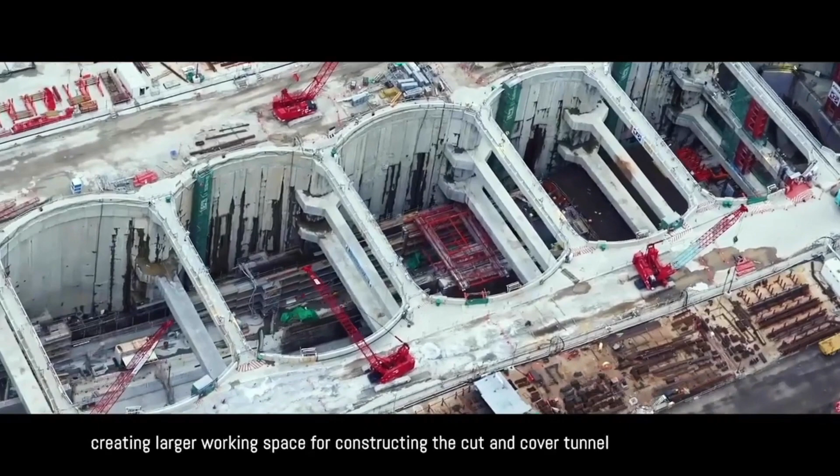The southern landfall adopted innovative caterpillar diaphragm walls as temporary retaining structures, creating larger working space for constructing the cut and cover tunnel, and saved construction time and increased efficiency. Unlike conventional tunnels, the Tuen Mun to Chek Lap Kok Tunnel is the first in Hong Kong to include a service gallery beneath its carriageway, facilitating maintenance in the future.

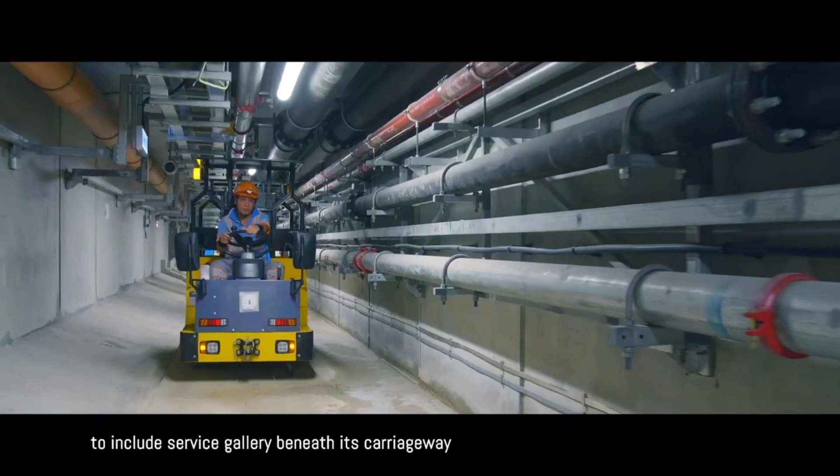A strategic link with improved connectivity adds impetus to economic development and offers greater convenience to travelers. The Tuen Mun to Chek Lap Kok link - go straight, go forward.